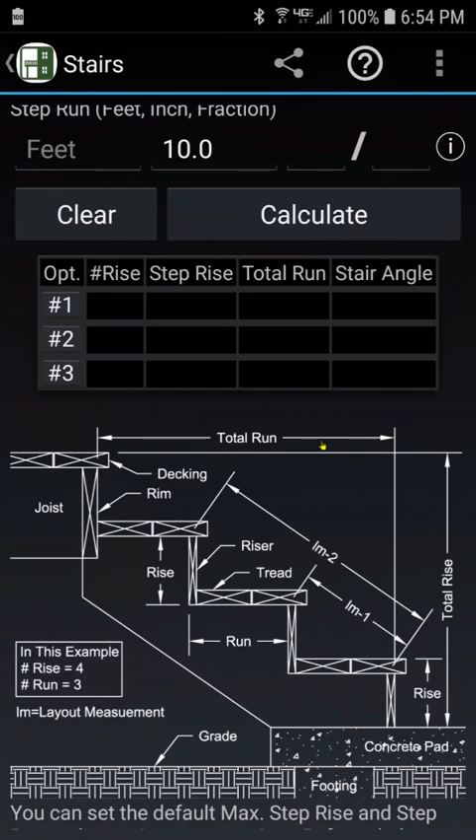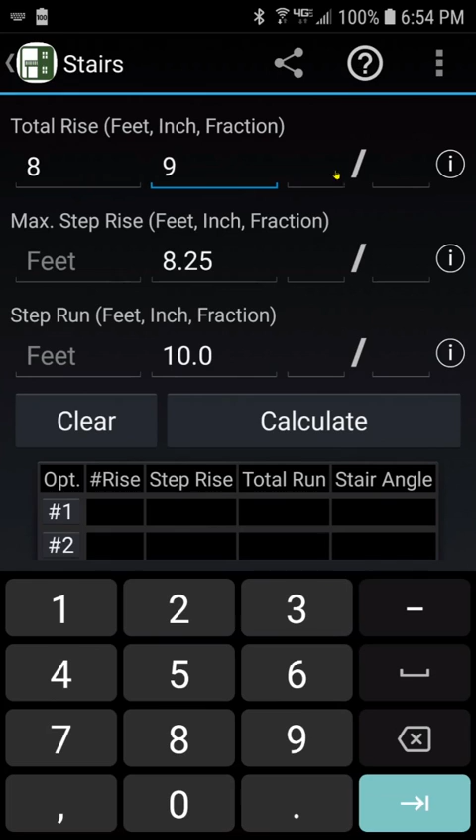So again, we decided that we did this total rise and it's going to be 8'9". So here's our total rise, click on this, we're going to put an 8 in for the feet, we're going to put 9 inches, and luckily it came out without any fractions, so it's a nice even number. Now when I hit calculate, what it does is it populates this little grid right here.

Now the first option is going to be the minimum number of rises you can get in. So for an 8'9" rise, with a max 8 1/4 rise, we end up with an 8 1/16 inch rise with 13 rises evenly distributed, and it's almost a 39-degree angle. That's a pretty steep set of stairs. Or we can go to 14 rises, add one more, it comes out to a 7.5-inch rise, and we've got almost a 37-degree angle. Or for the third option, we can have 15 rises at 7 inches even.

And that comes out, and our total run is going to be 11'8". Now you can change the settings so it only shows inches for this. Some people like to use feet and inches, some people like to use just inches. So if you don't like to see 10'10" and you want to see 130 in there, then in the settings,

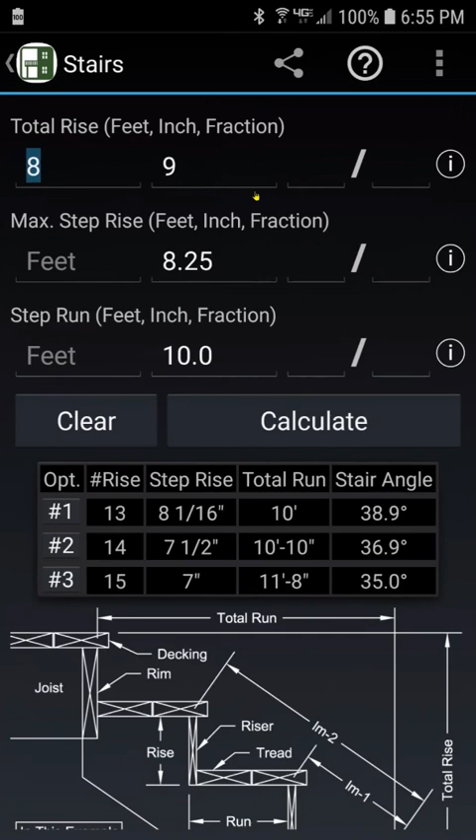if you go into settings and you change it, right here where it says measurement display, I have mine set to feet and inches. Metric is meters and millimeters, or you can change it to inches only. We're going to do feet and inches for now. We're going back to where we were working, and so it's calculated these 3 options for us.

So what we do now is we pick the option we want, because we want to get these layout measurements. When you're laying out a set of stringers, some people like to use layout measurements which go from point to point on the stringer, and that gives you a way to lay that out, and it helps determine whether everything's nice and accurate. You can step it off of the framing square, but you can still use these layout measurements to help you out.

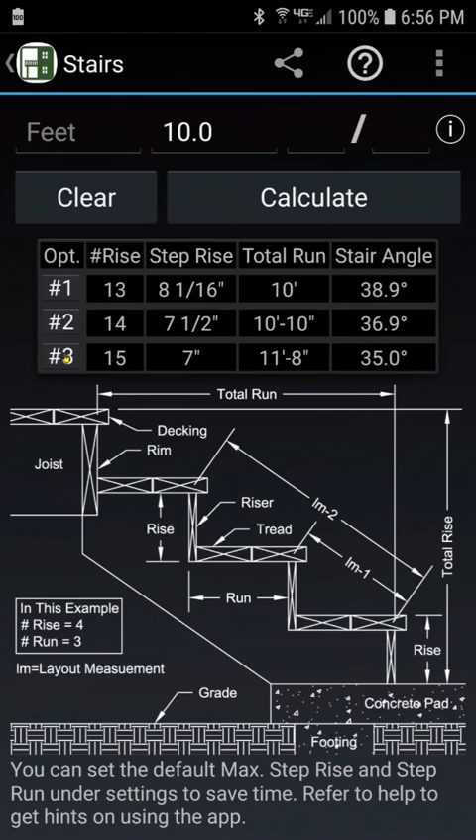So I'm going to pick option number 3 here and get a nice 7-inch rise and have 15 risers. So if I click number 3, I get all of those layout measurements we were talking about. It shows me my options, my step rise, my angle, and all of the layout measurements that go up each one of these. There's 14 of them here for our 14 steps.

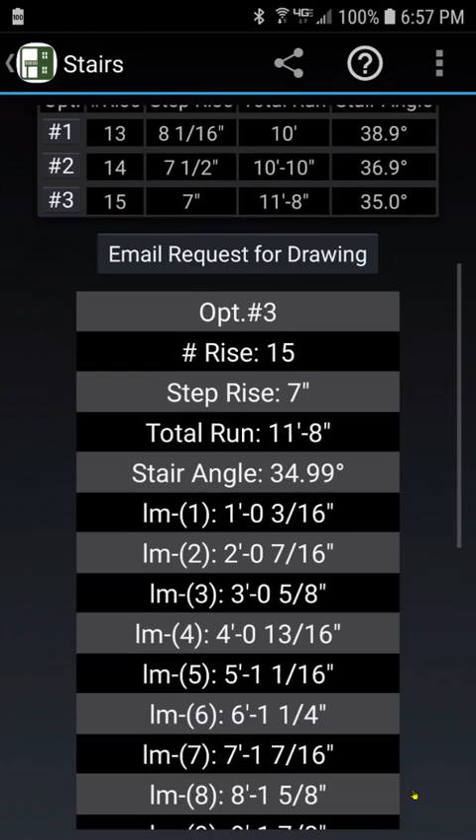So there's a couple other things you can do with this. Now that you've figured out your stairs, let's say you want to share this with somebody. You figured out what they want to be, and you want to share with the guy that's going to be building them what you came up with. So you can hit share on your smartphone here, and then you can hit the email app, and it will come up, a little slow, and show us an email that it's configured.

You can fill out the to however you want, but it went ahead and put this in. These are the settings that it got from our settings when we calculated: we were doing our measurement display in feet and inches. We had our accuracy set to a 1/16 of an inch. We had set our total rise at 8'9", our max step rise 8 1/4, and our step rise at 8 1/4, and our run at 10.

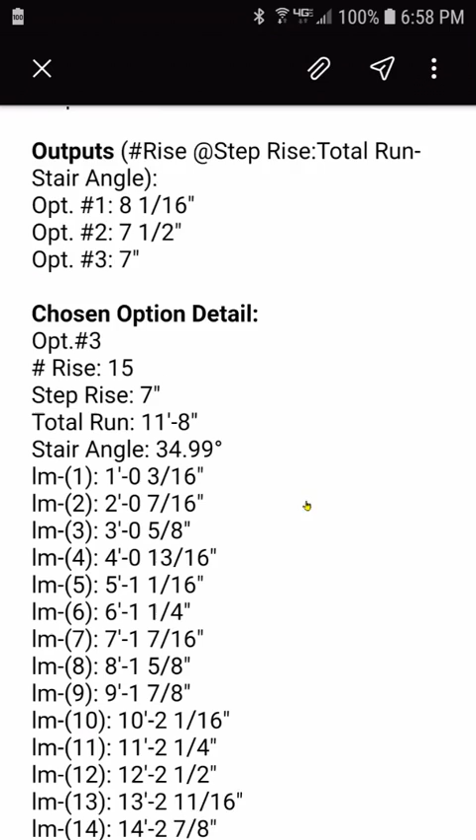These are the three options that were presented to us, and we chose the third one, so we got a 7-inch step, and there's all those layout measurements, and it even includes that little drawing in there so we got an idea. So now we won't send that email to anybody, we'll just discard it, and then we're back to our screen here for the stairs.

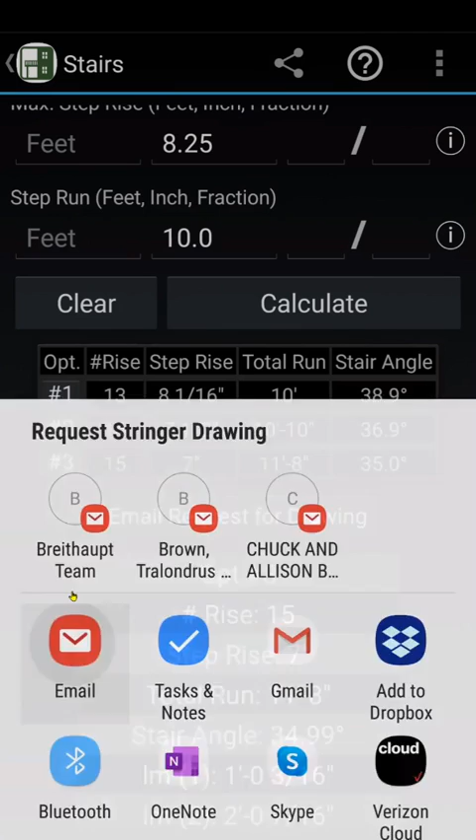There's one other really cool thing that you can do, and this is a new addition to the stairs module: you can email a request for the drawing of that stringer. So if we click the email request on here and we send that email off, this email is going to be completely configured for you and have all the information in, and even the place it's going to, and all you have to do is click send.

Come on, little elves. Oh, something's coming in. And there it is. So here's our email that was replied to us. And if we click on that, there's going to be an attachment to it. And the attachment is a PDF file. And it says, attached is the stair drawing you requested.

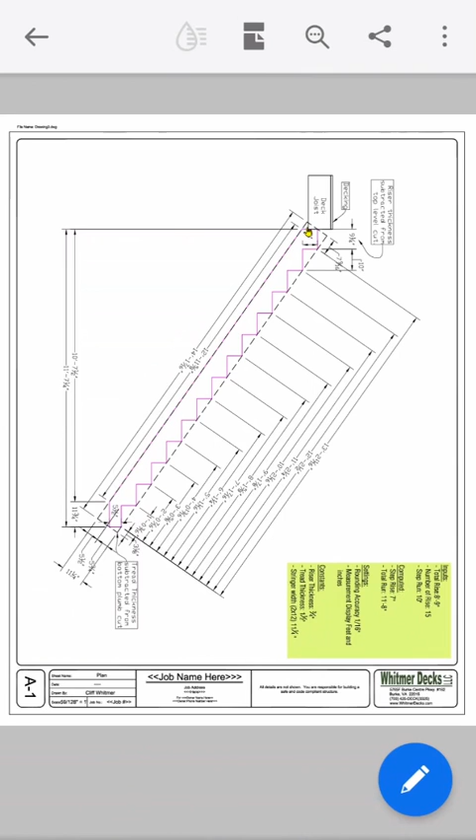And if we click on this, once the PDF viewer starts up and shows it to us, we're going to see our fully dimensioned stair stringer. And there it is. So this has all the layout measurements. This is the bottom of the stairs down here up to the top, and you can see where it steps onto the deck.

We can see it puts right on the drawing our inputs, which was our total rise 8'9", our number of rises were 15, and our run was 10 inches. And then it shows the step rise we came up with, the total run, our rounding accuracy, things like that. Now we do assume a few constants in this. Right now, I assume a riser thickness of 3/4 inch, a tread thickness of 1.5, and a stair stringer that's a 2x12, so it's 11 1/4.

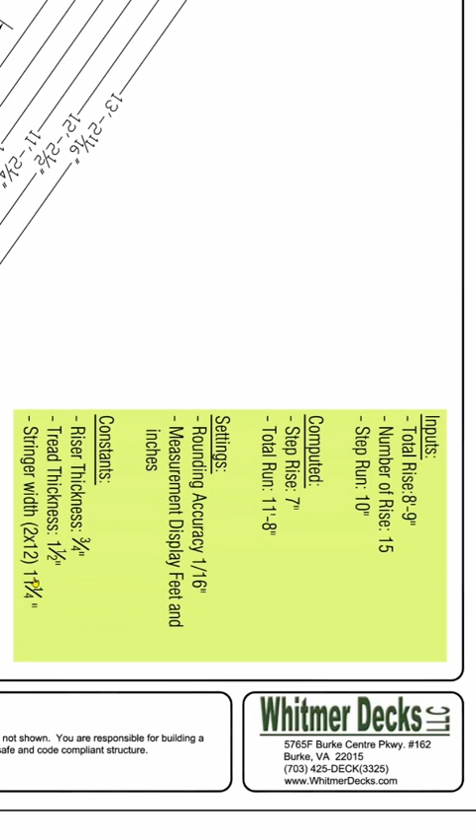Now the only place that really makes a difference is on the very top and the very bottom. Everything will still work out. As a matter of fact, the layout measurements will all not change. The only thing that it really changes is right here. You see how it's 5.5 inches? This measurement right here for this width is 5.5.

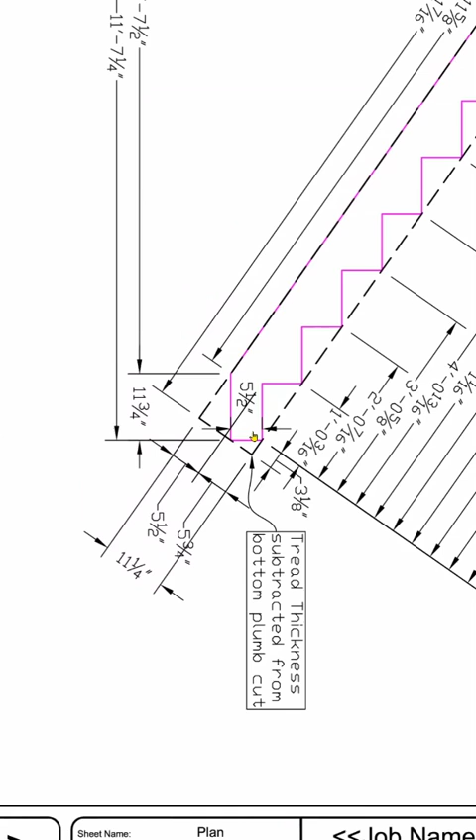The reason that's 5.5 is we had a 7-inch rise, because this is our first rise. This is where we'd step off the concrete pad onto there. So basically, your bottom step, you subtract the thickness of the tread from the bottom step. So we had a 7-inch rise. We take off the 1.5 inches for the tread, and we get 5.5.

Now, same thing on the top. Our runs were 10 inches, so all of these cuts right here will be 10 inches wide. Except because there's no riser at the top, we take off the thickness of the riser, which was 3/4 of an inch, so this is only 9 1/4 on the top.

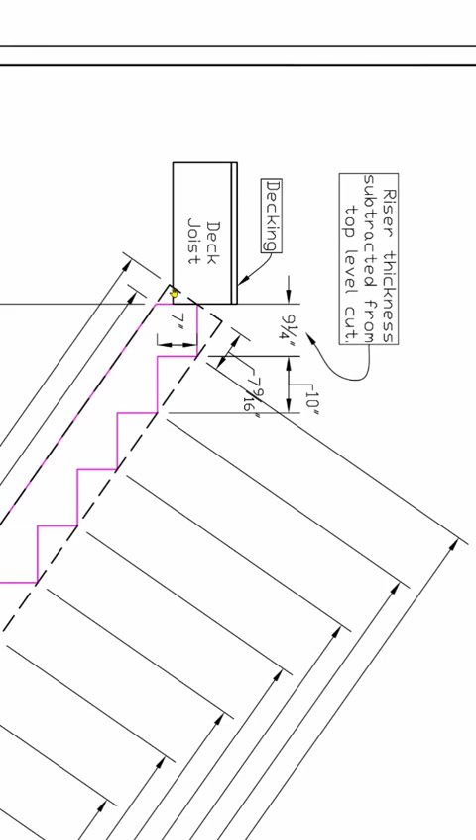Also, you're responsible for making sure that this is a secure connection. A lot of times I let this piece extend back past and put like a metal strap on there to tie that up, because this would be a big heavy set of stairs here with 15 rises. So you want to make sure you got a good solid connection up there, and you put footings or whatever needs to be done at the bottom.

But that gives you an idea of what you can do with it and get a fully dimensioned drawing back of the stairs that you need to cut out. And that's going to make for a lot less mistakes in the future. So that gives you an idea of how the stair module works. Like I said, me and my guys use this on every deck.

You really only have to put in one measurement. If these defaults are correct, you put in one measurement, pick the option you want, and boom, you have everything you need. And it gives you these three options so you can look at it, because sometimes you're stuck. Sometimes you only have 10 foot for the run where there's a fence in the way, there's a tree there, so you need 3 foot at the bottom of that 10 foot.

Code also dictates that you need a landing that projects out 3 foot from the end of the stairs. So if there's a tree that's 13 feet away from where these stairs are starting, the stairs are going to go 10 feet. So you need to keep it to that. You're going to have to make your stairs a little bit steeper. Anyway, that gives you an idea of how the stair module works.